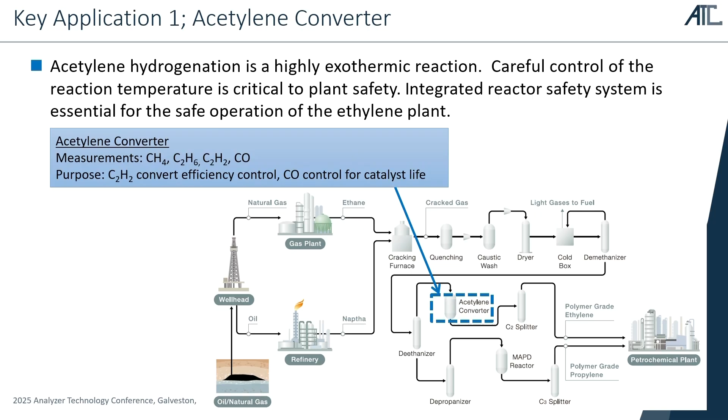And then we have two key applications we are focusing on. So one is the acetylene converter. The acetylene converter is a highly exothermic reaction, so careful control of the reaction temperature is critical to plant safety. So an integrated reactor safety system is essential for the safe operation of the ethylene plant. Our target measurement components are methane, ethane, acetylene, and also CO, so we can measure those 4 components as our target.

And also this table is showing our target specification for the whole components: methane, ethane, acetylene, and CO. So for the acetylene converter, inlet, outlet, and also mid-bed, especially focusing on the acetylene converter outlet, it's targeted at less than 10 ppm. That is the most important. And also other control components like CO for safety, and also high concentration acetylene for the inlet of the converter, that is our target specification. And also each performance specification is there.

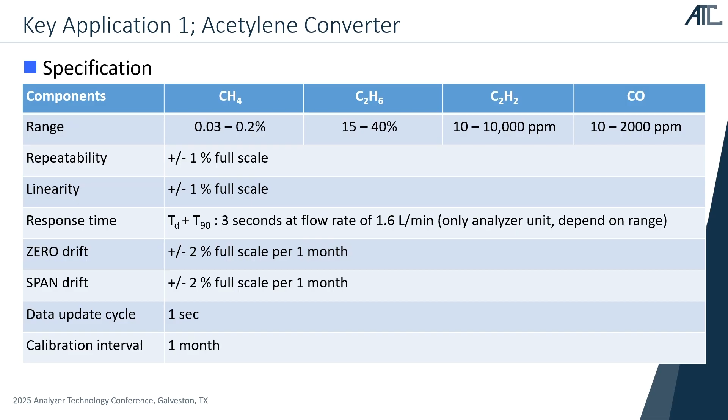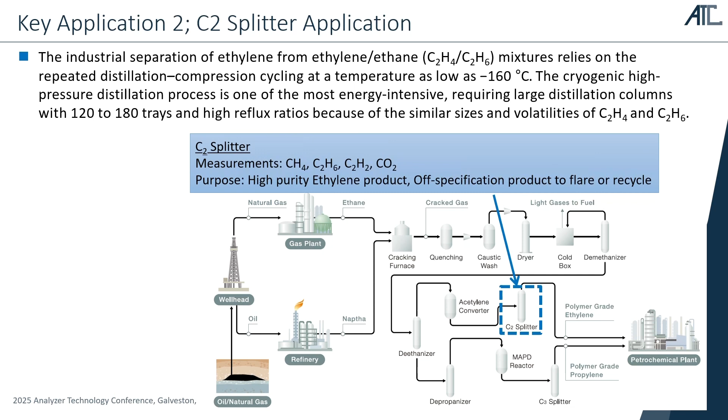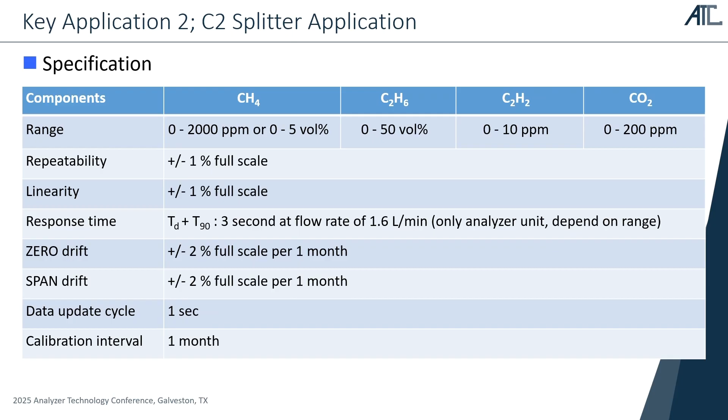And also we have one more key application. The second one is the C2 splitter. That one is the production for ethylene, just separation of the ethylene from the ethane. That is the final step of the production of ethylene. That one also has to monitor the impurity of components like methane, ethane, acetylene, and CO2 as well. So that is a specification for 4 components: methane, ethane, acetylene, and CO2. The performance specification is the same as the acetylene converter. So our target performance level is the same for both applications, that is our target specification.

And then from this slide, I want to explain our product. So the process laser gas analyzer, it's called the PLGA 1000. It has many advantages in gas sensing: high resolution using a mid-infrared laser system, and also fast response, 3-second analysis time. That is a quick response, and also high sensitivity, 20 ppb is the minimum measurement range.

And also, just one single enclosure has up to 6 lasers, there is a maximum of 6 lasers. And also this analyzer has a robust, simple, and compact design. And there is one more advantage: high selectivity by the unique interference correction method. That is our feature of this analyzer.

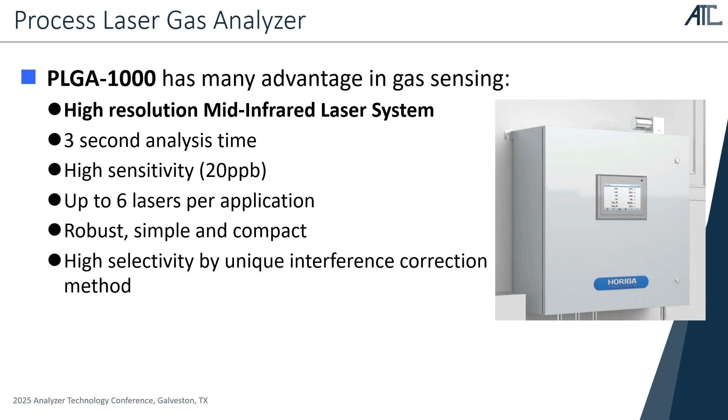And I can show you that production concept. So top left hand is the outline picture of the analyzer, and then left bottom one is open the door, just internal analyzer. So our key component, optical unit, that's on the right hand.

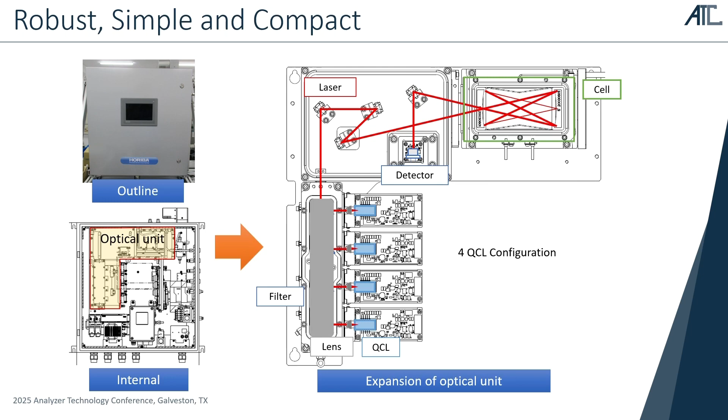This figure just showing the 4 QCL, 4 laser configuration. So we have the whole laser right now, and then each laser emits to the lens and the filter unit, and also goes up to the laser unit, and then we have the Herriott cell, and back to the detector. That is our optical unit design.

And also we have the key components. One is the quantum cascade laser. This quantum cascade laser is made by Horiba, Japan, in Kyoto. And this QCL laser is a semiconductor laser invented in 1994, which can emit from the mid-infrared to the terahertz.

So the operating wavelengths can be selected by designing the structure of the material. That is our capability of this manufacturing. Wavelengths are adjusted appropriately for each gas application. That is our strong point. Then all key QCL equipment is made in Horiba, Japan. That is strong. And also one more key part.

So this is a Herriott cell. It has a path length of 5 meters with a cell volume of only 40 milliliters. That small cell volume allows the gas to be replaced rapidly, which is a benefit for the analysis speed and response time. In addition, the surface area is very small, so that means the risk of adsorption can be reduced. That design is compact and suitable for field replacement, meaning easy service and maintenance. That is our benefit.

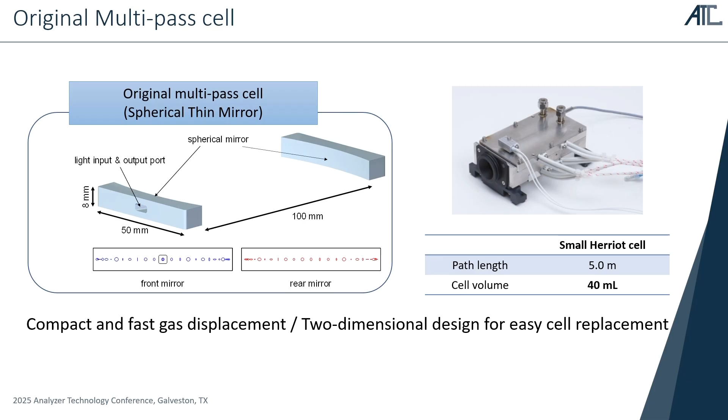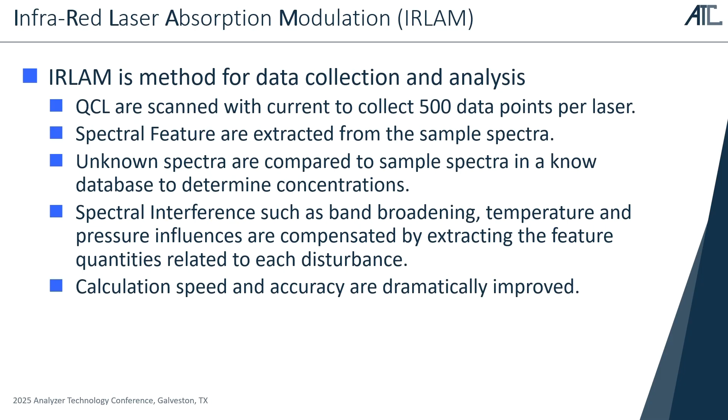So this is a general talking, just talking about a laser gas analyzer. IRLAM is an absorption method of IR. Each component has absorption wavelengths corresponding to the band. The laser has a high wavelength resolution. They can scan a narrow area like a blue dot square. Then we can target sample absorption while designing to minimize spectral interference.

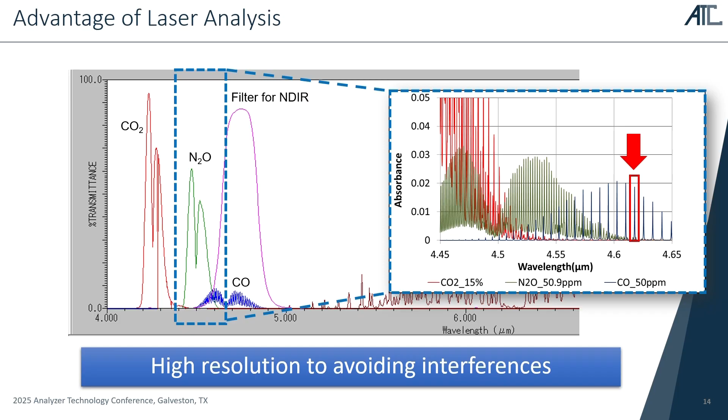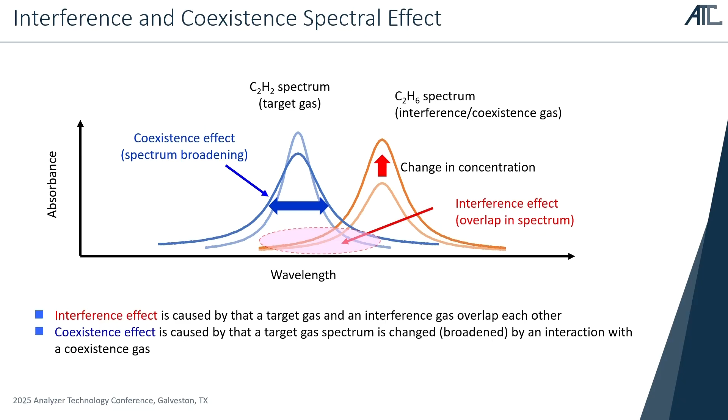IRLAM has the advantage of compensating for temperature, pressure, and spectral interference effects. As you know, IR measurement has interference and coexisting effects. So we need to care about two effects: interference and the coexisting effect. The problem is when the balance gas changes by the percentage level, the shape of the spectrum also gets fatter or skinnier. That is a broadening coexisting effect. So when the QCL scans the wavelengths, the phenomena needs to be corrected and compensated. It's called the broadening effect for the coexisting effect.

This slide shows a comparison between NDIR and IRLAM. The left side shows NDIR, which has a thermal light source, gas cell, and detector. NDIR has the absorption spectrum also converted to a detector signal, versus wavelength, so the x-axis always shows wavelength. On the other hand, with IRLAM that is a big difference: the x-axis is always time, not wavelength. That is the difference. Also, in the calculation method, IRLAM can use a feature reference signal. That is a difference. I will explain that reference signal.

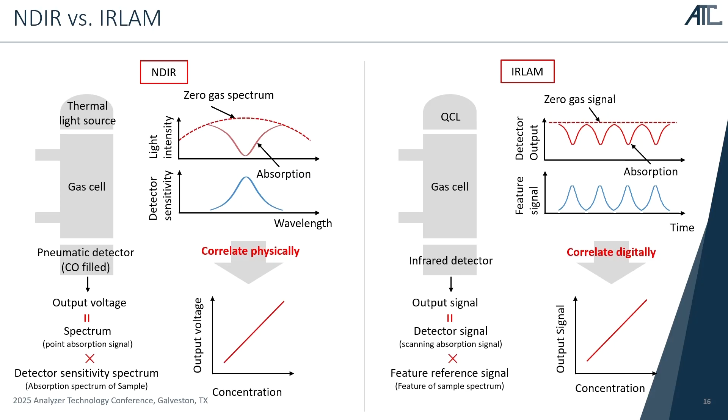This feature quantity can be obtained by the sum of product of the absorption signal and the feature reference signal. If the shapes are similar, the feature value becomes large. If the shapes are not similar, the feature value becomes smaller. Since this feature quantity is proportional to the concentration, it can be quantified by assigning the value based on the concentration at the time the feature quantity is acquired.

The left side shows the sample absorption signal. As I said, the x-axis is time, taking 500 data points. Then we set the feature reference signals, F1, F2, F3, and F4.

F1 is the sampling target component, for example acetylene, C2H2. F2 means interference, such as ethylene or ethane and methane—that's the interference gas, we set F2. Then F3 is temperature. If temperature changes, the signal also changes, like a shift. And F4 means the broadening, like pressure.

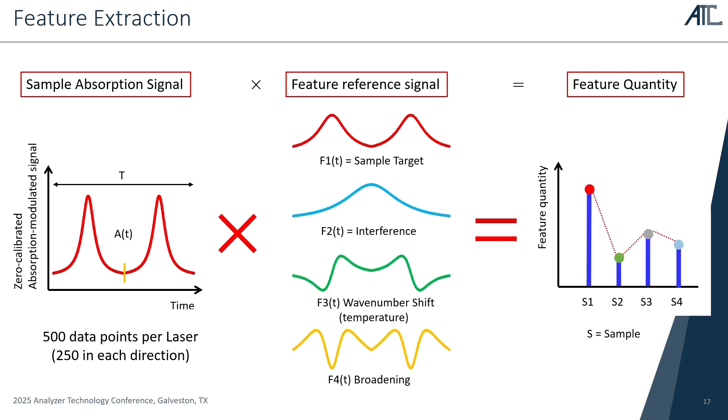So we acquire this data before shipment, before going to the customer site. Then we need to create a database, so we set F1, F2, F3, F4.

The left table shows creating a database. We flow a sample target gas, acetylene, keeping the same concentration like 10 ppm, and change the broadening—the pressure—from high to low. That gives us S1, S2, S3, S4, the signals. So if we change the broadening, if we change the pressure, F4 is high and then F4 is low.

Also wave number shift relates to temperature, so we change to negative temperature and positive temperature. S3 changes, but S1, S2, S4 stay the same. So we need to create that database.

The right table shows the same idea, but flowing the interference gas, like ethylene and methane, and we change the pressure and change the temperature. That is our database, created in our facility first.

This is the actual calculation. IRLAM applies the matrix operation as described here.

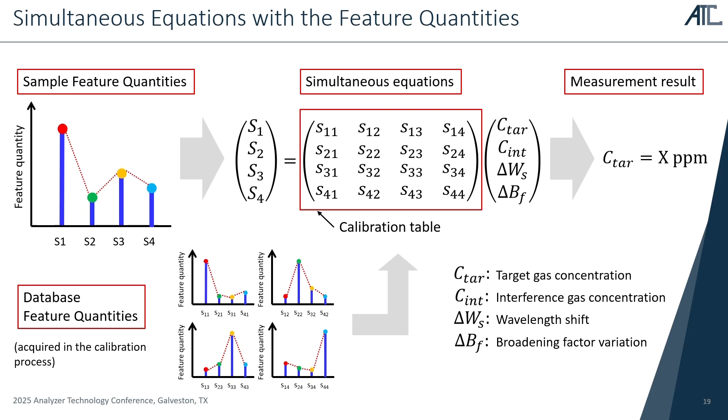This table shows the test results in our laboratory first. The upper right shows stability data for acetylene, C2H2, almost one day of data, 24 hours.

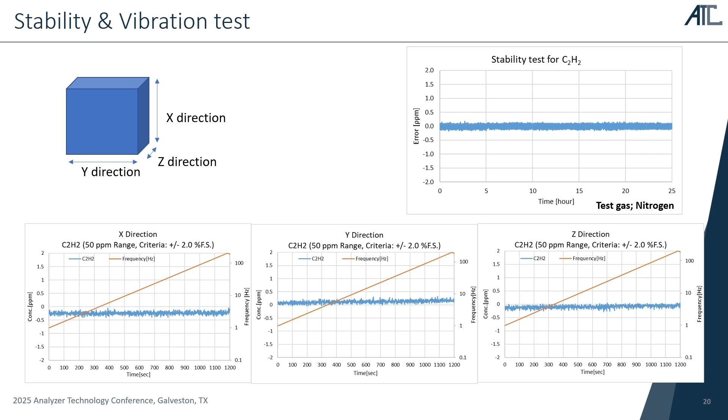We feed nitrogen, and the error, the noise level, is almost plus or minus 0.1 to 0.2 ppm. We also tested vibration in the X direction and Y, Z directions. This data shows it's stable, so our alignment issue is nothing—no change in alignment. That is the data for stability and vibration.

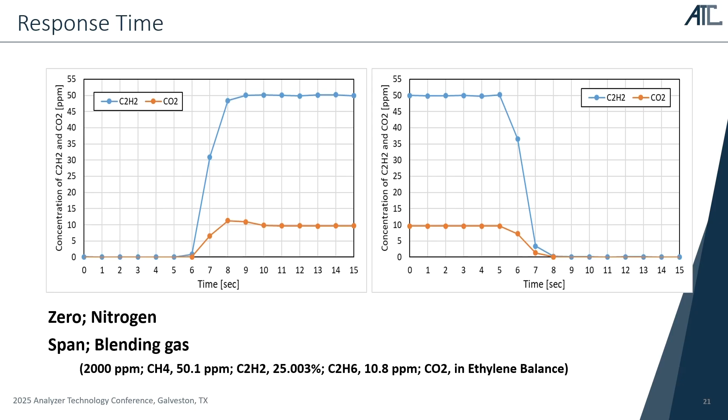That is the blending gas for the span. Just switching zero to span, the left graph shows response time of almost 3 seconds, within 3 seconds. Also switching span to zero gives the same response time, within 3 seconds.

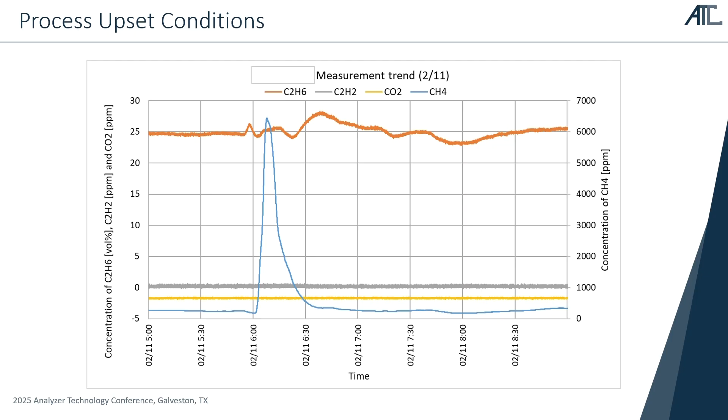At that time, acetylene and CO2 remained stable—meaning no interference, no effect from the high concentration of methane. That shows we can achieve good performance in interference reduction. Also, the orange ethane line fluctuates almost 25%, and our analyzer can still catch that fluctuation. That is one good result from the field trial.

This is another day from the same field trial. The upper graph shows our same data, with the x-axis as time, almost one day. The bottom graph is a comparison with another general QCL analyzer, not ours.

This is a general QCL analyzer and also GC data. The colors are the same—orange is ethane, gray is acetylene, yellow is CO2, and blue is methane. We're using the same sample point to take the data.

In our data, at 6 a.m., methane spikes up, while gray, yellow (CO2), and ethylene remain stable—no effect. But in the bottom graph, there is fluctuation, especially yellow CO2, which shows very random noise. This shows the general QCL has some interference or effect, but our QCL analyzer has no effect. That is another good result.

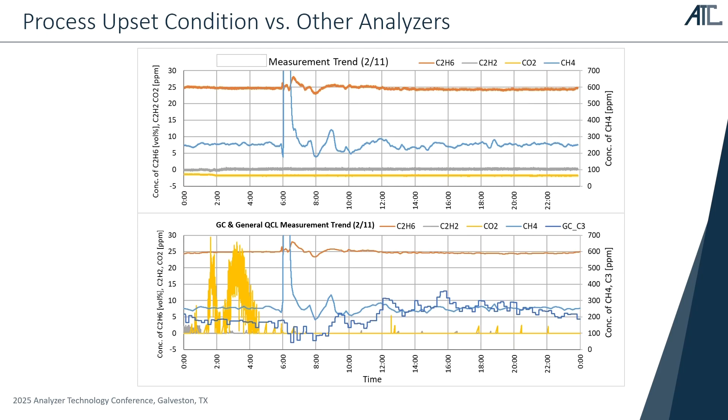And different data, this is March 2nd. Around 7:30 a.m., it was the same spike of methane, spiking up to around 800 ppm, but CO2 and acetylene, gray and yellow, are stable. That is a good result as well.

So we can achieve the development for the ethylene plant for the impurity measurement. And then we are keeping developing the other application. So this one is one of the new applications.

This is carbon capture. After capturing the CO2, we can measure the impurity. So background gas is CO2, it's a rich CO2, and then we can measure NO 50 ppm, NO2 50 ppm, and SO2 50 ppm. That is the impurity for the carbon capture process, to inject on the pipeline to protect against corrosion, or for utilization.

for the catalyst. So we can achieve that application, and the measurement noise level is almost 0.02 ppm for the NO, and 0.005 for NO2. It's very beneficial for direct measurement.

So traditionally, NOx measurement uses chemiluminescence with a NOx converter. But a NOx converter has some error, some efficiency error. So that's why, if they want to measure more trace level, the laser gas analyzer is an advantage for that direct measurement. That is one of the application developments.

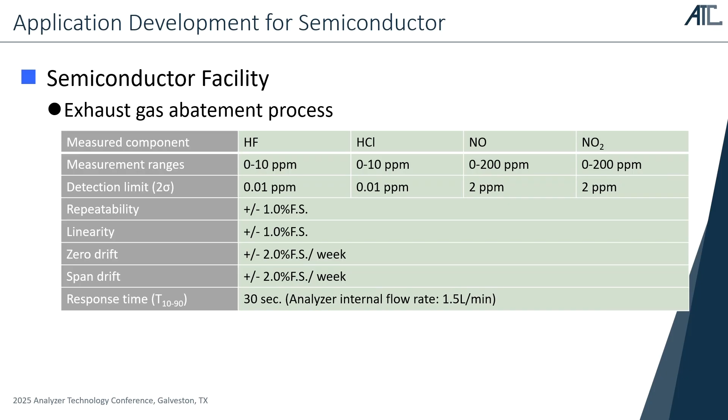So this is similar to the CEMS application, so they don't need a quick response. That's why this specification is almost within 30 seconds. And then HF and HCl is less than 10 ppm. So we can also develop that application using IRLAM technology. That is one of the application developments.

And then this is the final presentation, the conclusion. So we developed a new gas analyzer with IRLAM technology, achieving high sensitivity and fast response. The field trial test in the ethylene plant was a good result. We also achieved impurity measurement in new markets like carbon neutral and semiconductor. Next, we want to expand to more components and also applications. Thank you so much.

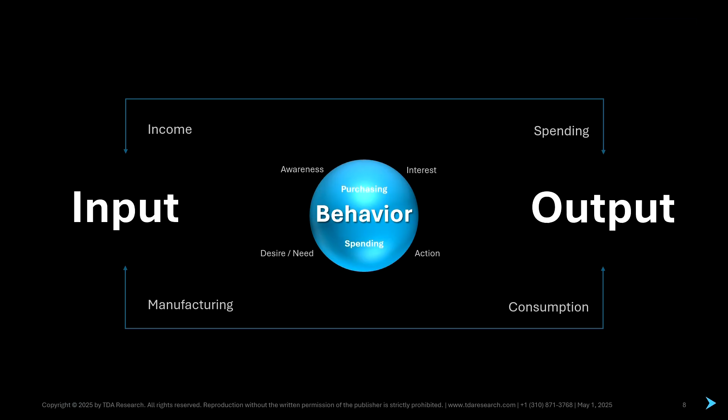Anyways, another way to look at the data is to understand the relationship between manufacturing and consumption, and understanding the energy and economics that goes into bringing a product from farm to table. So what macros should you look at? On the input side, it's employment, industrial production, energy - those are the things that will give you some clues. On the output side, it's currency, GDP, inflation, trade data.

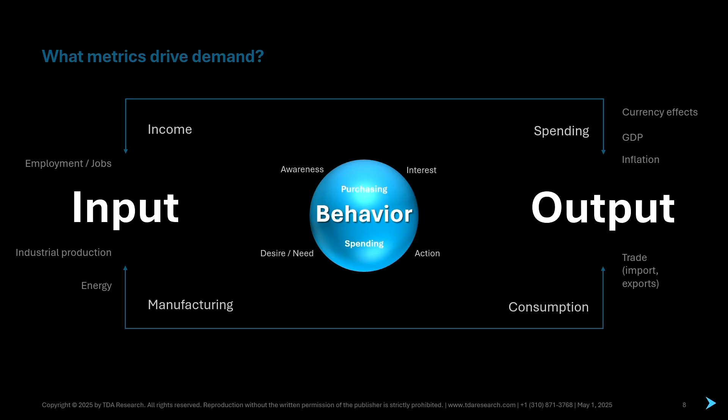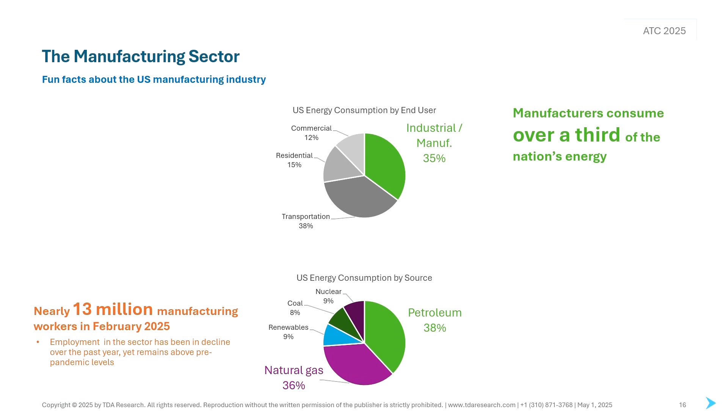I wanted to share some fun facts about the manufacturing sector. Manufacturers consume about a third of the nation's energy. Petroleum and natural gas represent 3/4 of the consumption. There are about 13 million manufacturing workers. For every dollar spent in manufacturing, it adds about $2.60 in overall economy. Manufacturers account for more than half of R&D spending. Pharma represents that lion's share.

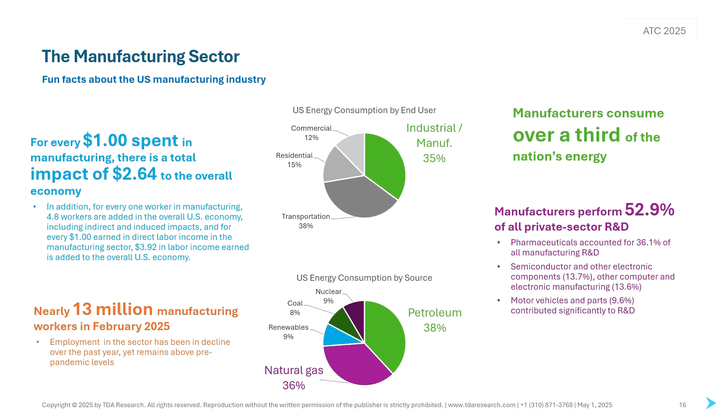Okay, and then here, last year I talked about the 80-20 principle and presented some data about the retiring workforce and the manufacturing industry. We tend to be a little bit age-heavy on the older side, and I wanted to see if there was any significant difference.

So I want to appeal to you hiring managers. Remember that the X in Gen X means experience, and the M in millennials means more mistakes. So little Matthew will forget to turn on that analyzer, and you're going to run into problems.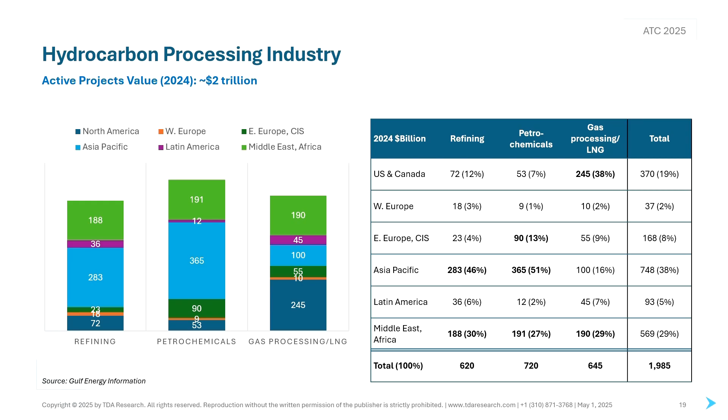So those are the drivers of growth. It'll be interesting to see what they say later this year, considering we are moving toward a protectionism and reshoring society.

So what are the tariffs telling us in this globalization strategy? Really, the economy of scale is no longer viable. Do one thing great, that's essentially what it is. Do one thing great and scale it. So that's not what the administration wants. We want to bring things closer to the consumer. So it's that closer-to-the-consumer concept. Build things smaller and closer to home.

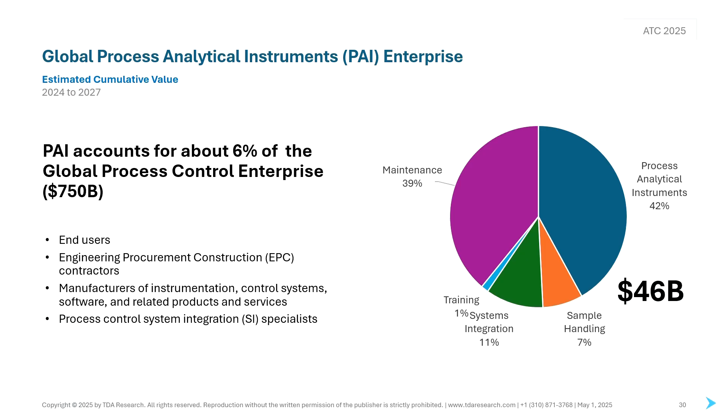Now let's take a look at our market, the process analytical instruments market, just for some background. The instruments market is about 6% of that global enterprise of what we'll call $750 billion. That includes end users, all the money spent by end users, by EPCs, the instrumentation manufacturers, and process control systems. For us, it's about 46 billion in terms of enterprise. We're looking at sort of 4 years in total, and that cumulative value is what that number is.

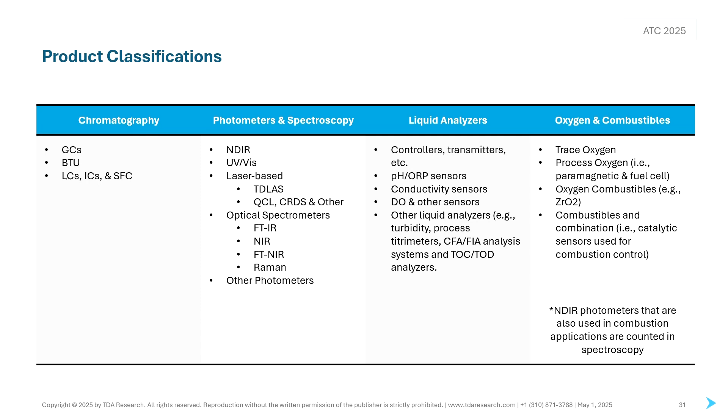This is how we break out the market by technology: chromatography, photometers and spectroscopy, liquid analyzers, oxygen combustibles, moisture, industrial mass spec, advanced analyzers, and some other technologies.

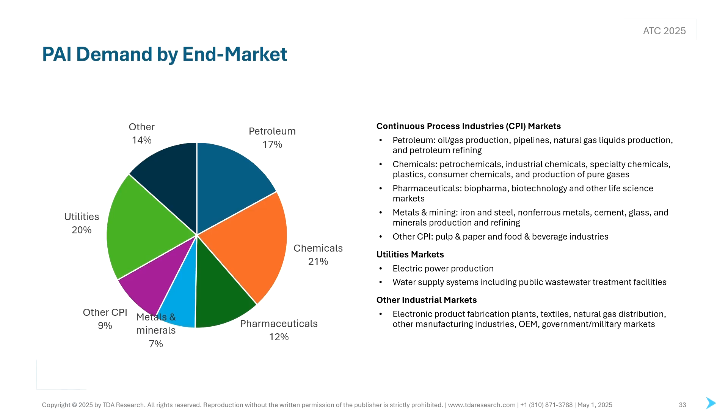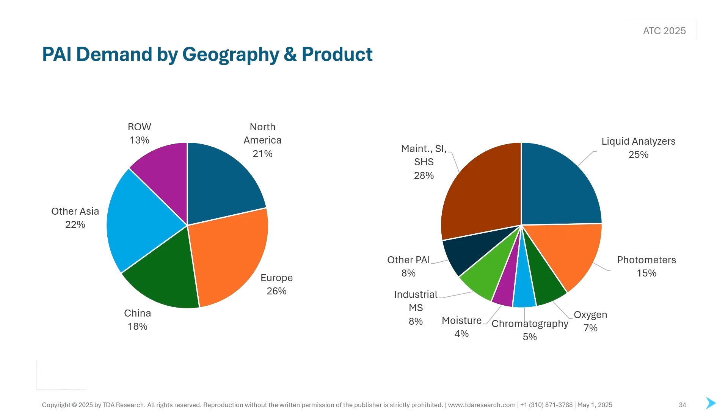Okay, I'm going to skip ahead. So just some key takeaways - I want to revisit the macros and our vendor survey. For macroeconomics, we saw some strong momentum coming into 2024, feeding into 2025 with the return-to-work economy. That was what I feel like was driving that market.